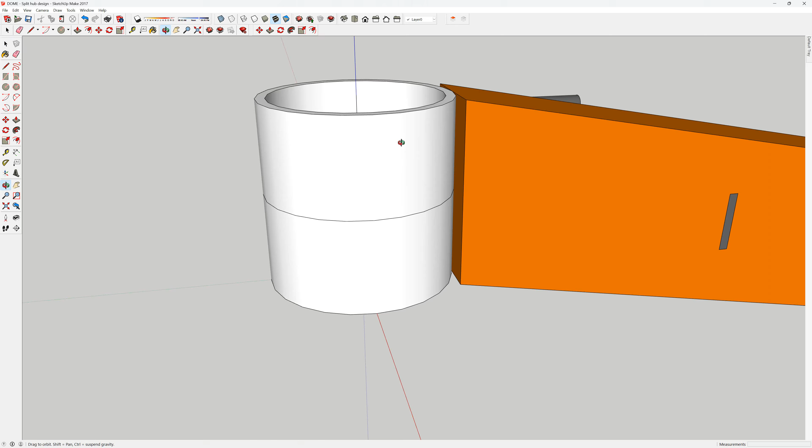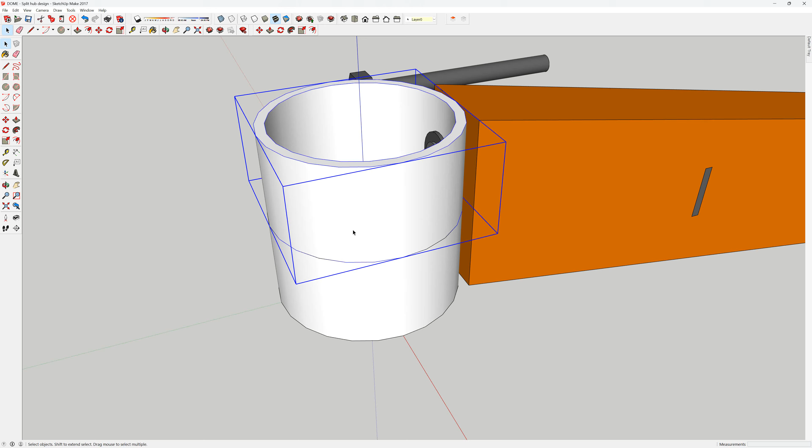Anyway, let me elucidate the situation. And I pose a rather grandiose claim. Have I solved some of my problems with the hub design that I've been challenging myself with? Now, if I hide this and this, we have a combination of a wood screw, and these are washers, and a bolt, not a nut, not a threaded rod, but a bolt. Well, if that's going to work, how is it going to work?

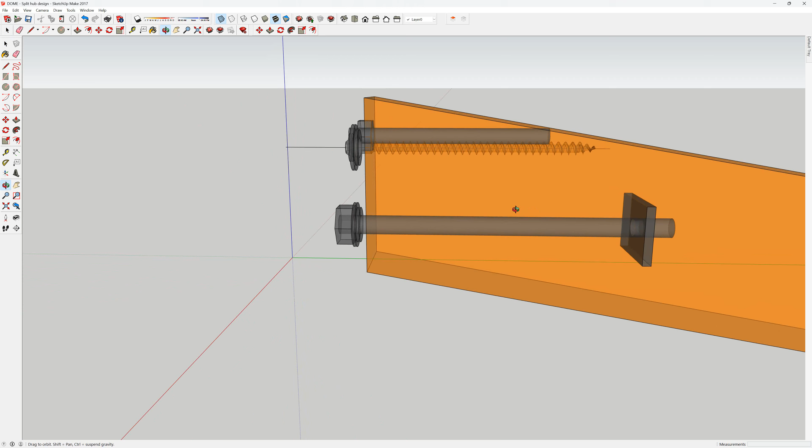Now, this plate, if I go into X-ray, shows the fact that this bolt goes through and is captured by a plate that will be threaded and slots into, believe it or not, a slot where the bolt can go through a pre-drilled hole and intersect a flat nut, you could say, just a piece of steel that's got a thread in it. And as such, any torque that I want to exert on this is going to be resisted by this.

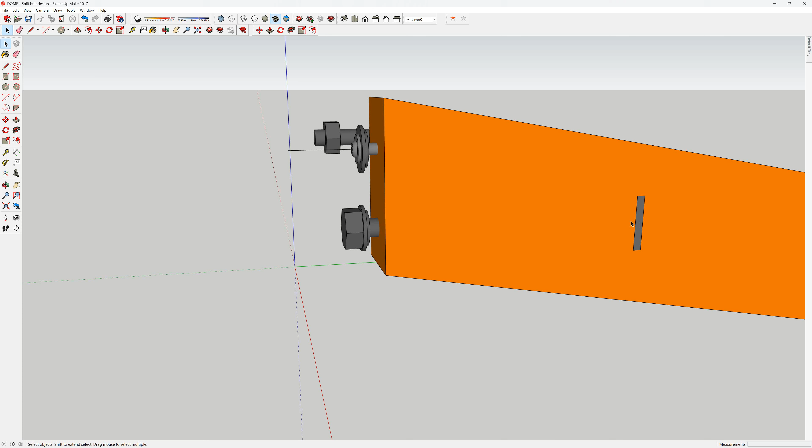In this case, I've got 5mm plate, but I'm probably making it a bit thicker, probably 10mm, but it's just a big nut. And therefore, all the pressure is in the neutral axis of the strut, as it turns out.

Sorry for the whistling, but I was born with that.

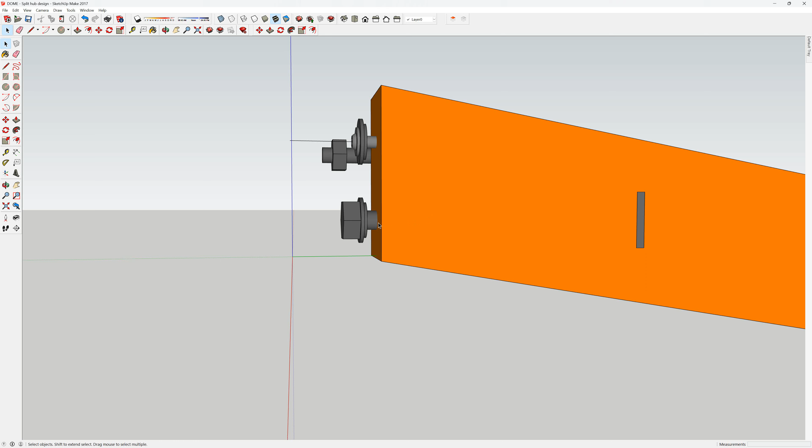But the bolt goes through into the neutral axis, and it can be cranked up to whatever pressure you want, and that, I would suggest, is going to be the greater chunk, percentage, whatever, of the strength of the dome. Just unhide, because it will transfer the loads onto the ring. The strut is pushing up against the ring. Therefore, there is a direct load path. So these should be able to be determined quite straightforwardly by an engineer.

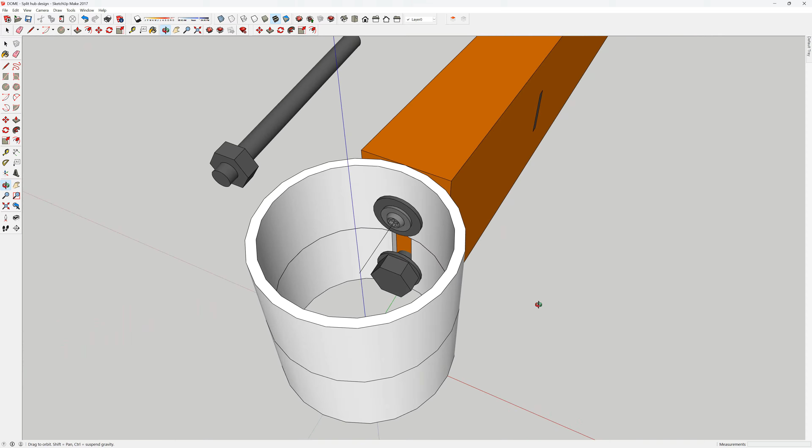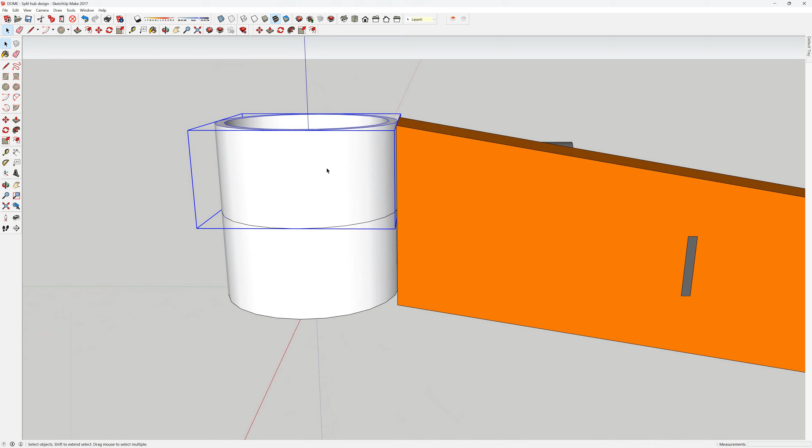And on the top, we have a construction screw or SPAX screw, and that can be tightened or loosened as we assemble the dome. In fact, we can assemble the dome with the bottom ring first, meaning we've got good access for getting in here and tweaking this up, because that is an issue when you use a nut and threaded rod. It's actually being able to get some sort of wrench, spanner, socket, whatever, in there when all the other nuts and threaded rods are occupying this ring.

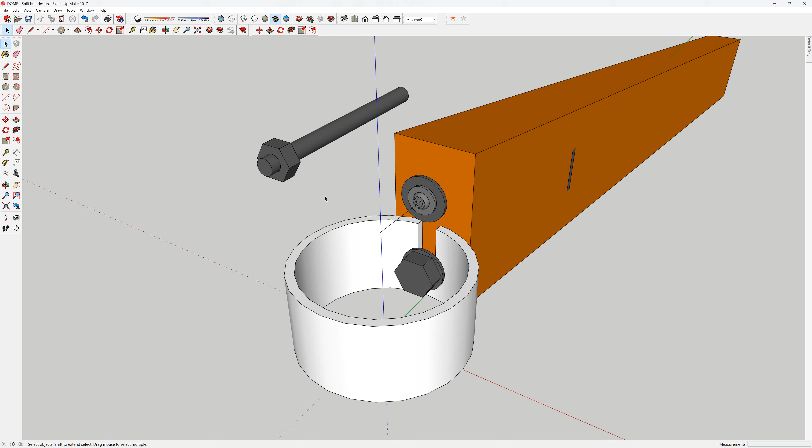This is a little bit tighter, more compact, I should say, and is square to the surface of the ring. Many of the other videos I've shown have the bolt or the nut and/or the screw at an angle. That introduces potential and real problems. The loading up of the thread, loading up of the head under stress, it might not go well. In a dome, who cares? Well, I do, and I want to eliminate that possibility.

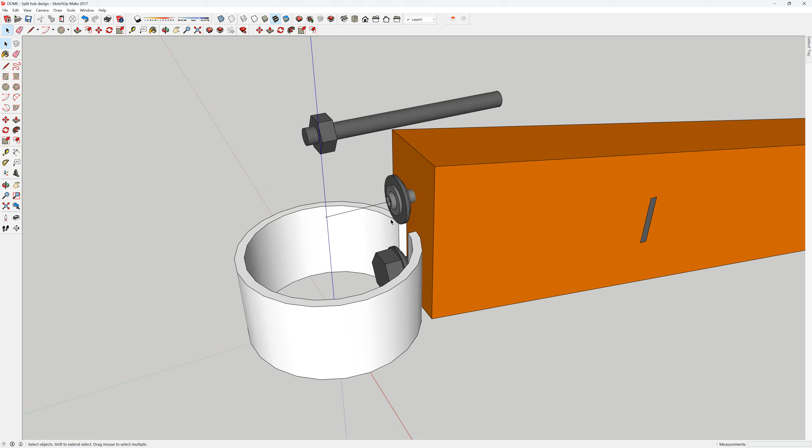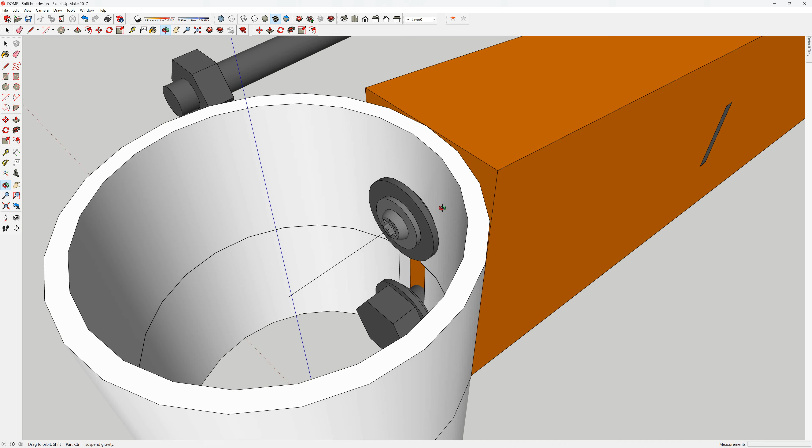So having them square to the ring's surface means that I can pack out, in fact I'll bring back the other ring, I can pack it out slightly by having a smaller diameter washer, then a larger one, and then I can have the screw come onto that. That means that the pressures are going to be dissipated from the head of the screw or the head of the bolt through the washers. They effectively give me a de facto curved surface that matches the ring. Good idea? Bad idea? I think it's an idea. And it does eliminate a lot of the concerns I had.

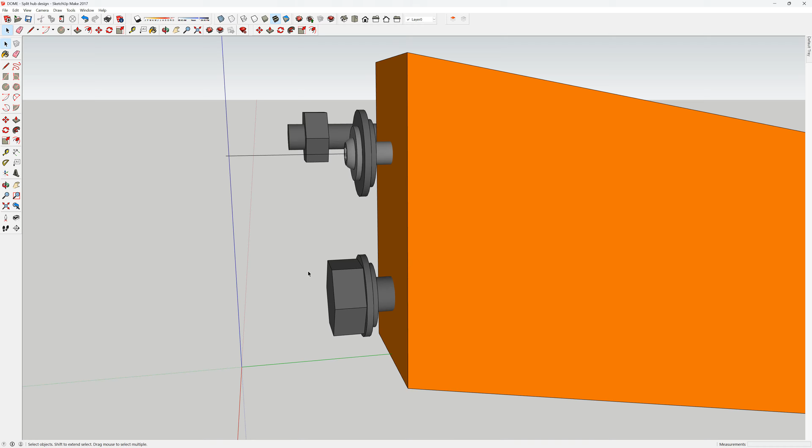Also very easy to do because I can determine the height or position of these, the screws or the bolts, beforehand. I can actually have them pretty much pre-assembled so that when I start my assembly, as I said before, you could start with one ring, and then as we progress, we can put the second ring on top and tighten everything up.

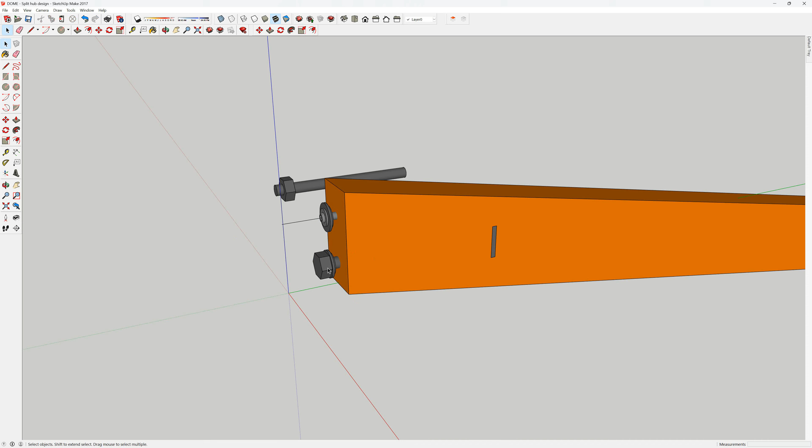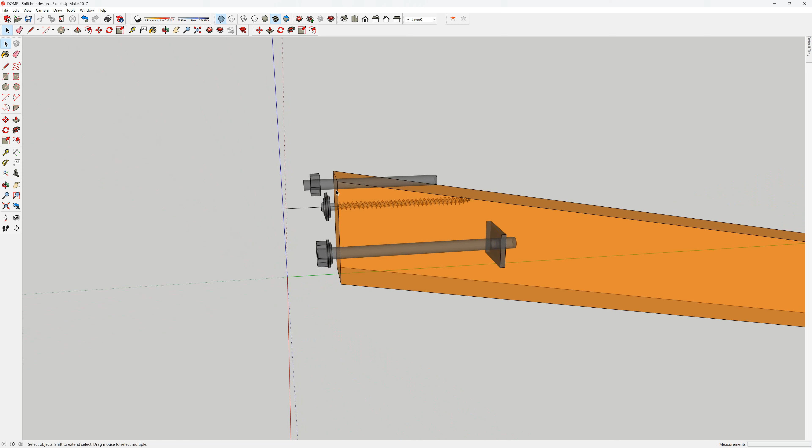I like it. Now there is a little bit of a fiddle to get the bolt in the correct position. That is more to do with the workshop jig that you would have for that, but it's doable. Because we're dealing with a 90-degree drilling jig positioning thingy, it's nothing like it would have been had it been on an angle. So, yeah, I like this idea. Actually, I'll just hide that.

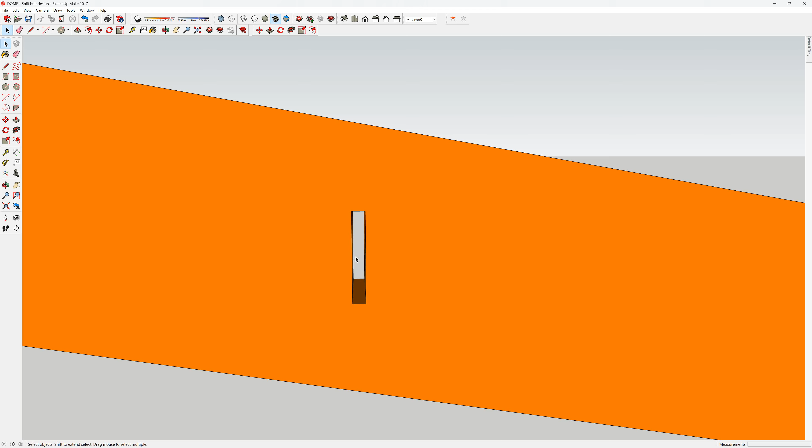So what we would have was a strut. I haven't shown the hole here yet, but the strut here with the hole going through, and then this hole being in position so that I can slide my flat nut into that area. So, yeah, quite like that approach.

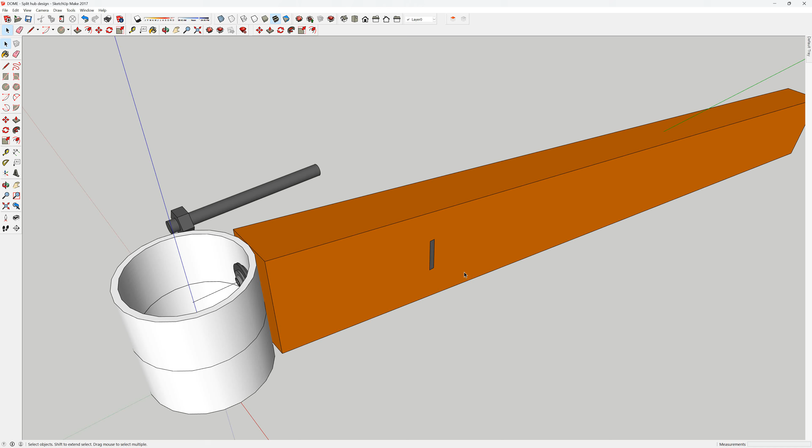Whether I use it or not is a whole different kettle of fish, but if it's information that you might want to chase down, you could draw up something in your drawing program if you're inclined to do that, or just hold your breath for a wee while, because I will be making this as a dummy trial run just to see what the issues are of actually manufacturing it in the workshop. The beauty is it's independent. Yeah, I'm going to have to reword that. The complexity isn't there that is in other versions of this approach.

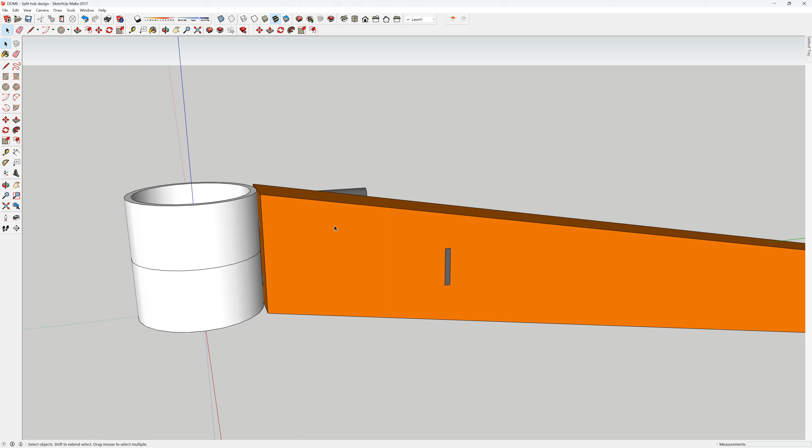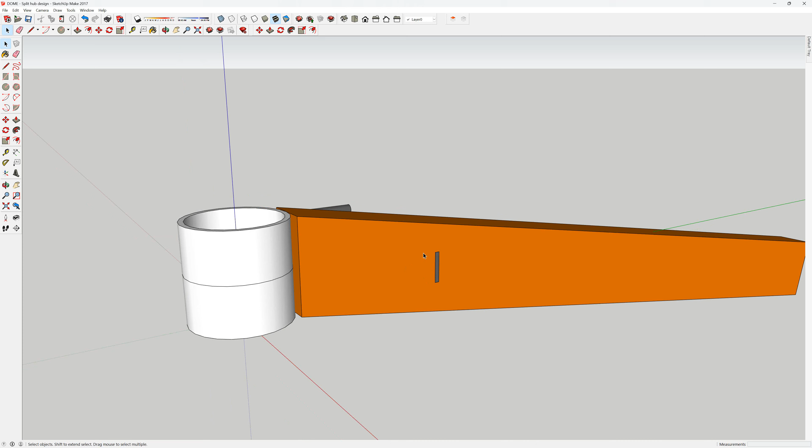This is not original for me. It is something that's been used over many, many years. It's just that I want to investigate it for myself in my own workshop and see whether I can replicate what other people have done in their domes using a very similar approach. This combination with the bolt and nut may be a little bit different, but it's got a lot going for it. Okay, well that's it. It was just another one of those videos that I had to make, scratching the itch. I like the idea of it. I really do. It has a lot of appeal.